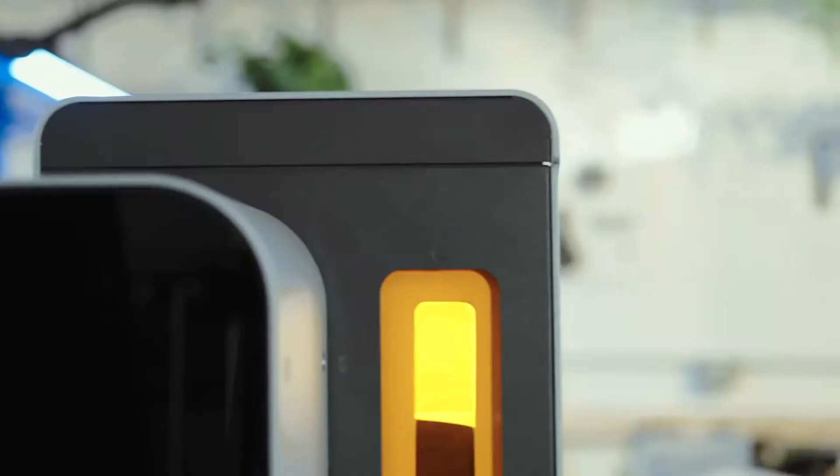Design and manufacturing workflows are closer together than ever, but our ideas still often exceed what we can physically realize. A new wave of independent manufacturing starts now with the Fuse 1, an affordable, compact SLS 3D printer with an intuitive workflow.

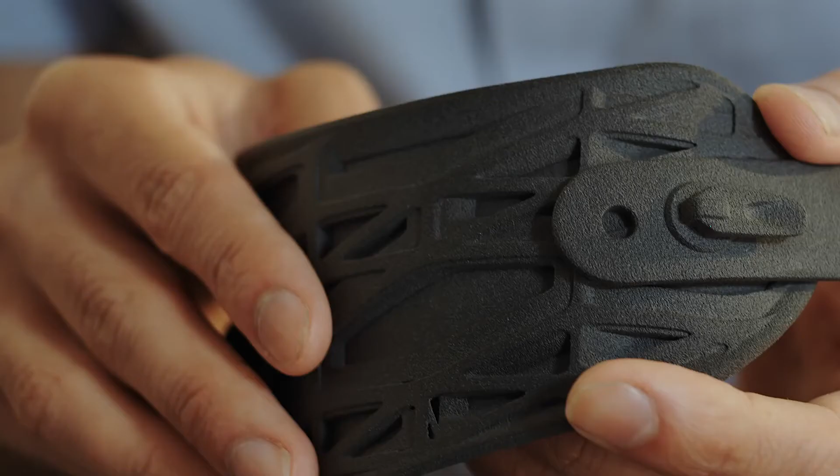Selective laser sintering, or SLS 3D printing, is relied on for printing strong, functional nylon parts. In the past, SLS has been too expensive and difficult to use for many businesses. The Fuse 1 allows you to fabricate production-ready parts and high-performance prototypes.

Control your entire process from iterating on your first concept design to manufacturing finished products. The process starts in Preform, our print preparation software. Preform's part packing algorithms can automatically arrange many models in a build. During setup and printing, the Touch UI walks you through every step.

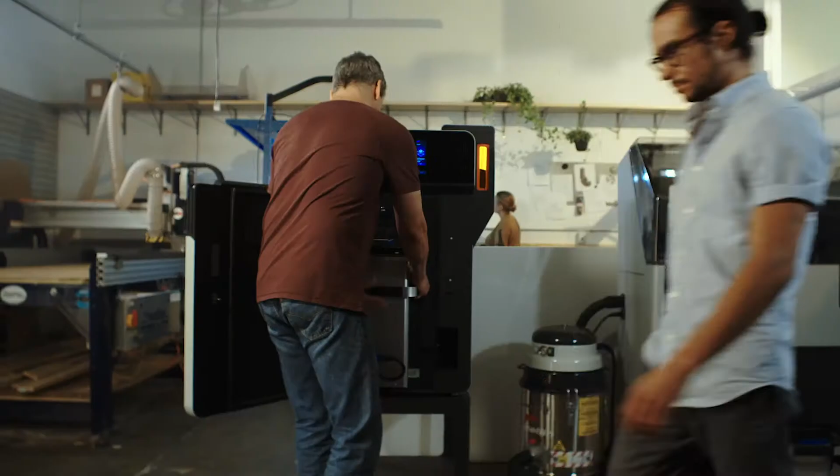Monitor your print from the touchscreen or from your computer via the integrated live camera. Once your print is complete, transfer the build chamber to the Fuse Sift. This safe, efficient powder recovery station completes the workflow.

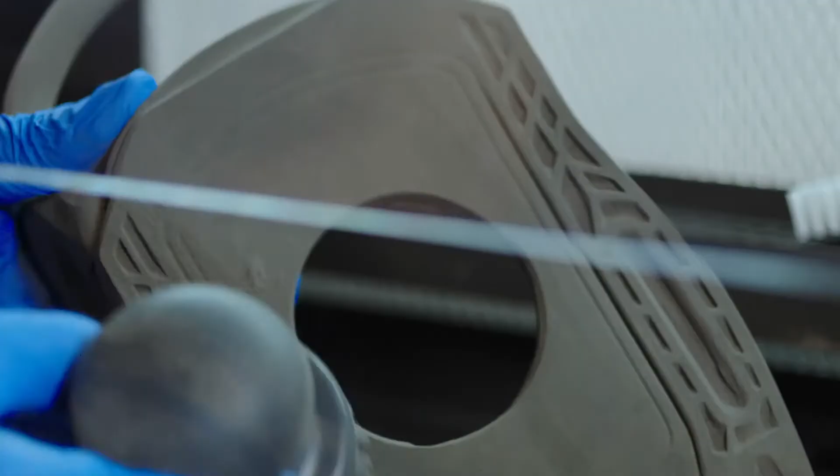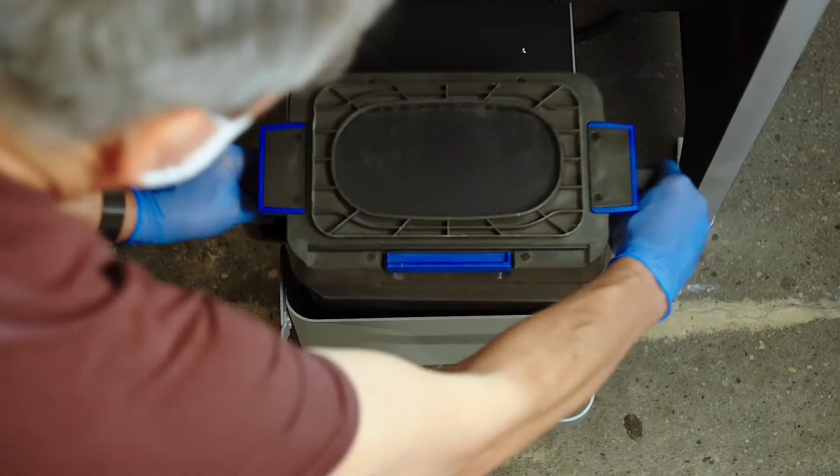Fuse Sift will automatically dispense and mix used and new powder after you set the ratio. Reduce waste by recycling powder at a 30% material refresh rate. This means you can print up to 70% recycled powder.

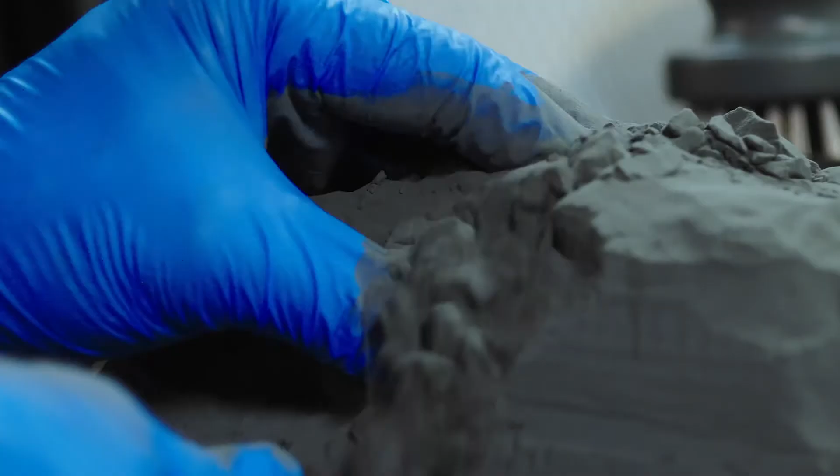After you've transferred a completed build to Fuse Sift, swap out the entire build chamber from the Fuse 1 for non-stop printing. SLS 3D printing fuses nylon powder layer by layer. The unused powder supports the parts during printing, so you can create complex, interconnecting designs with no need for support structures.

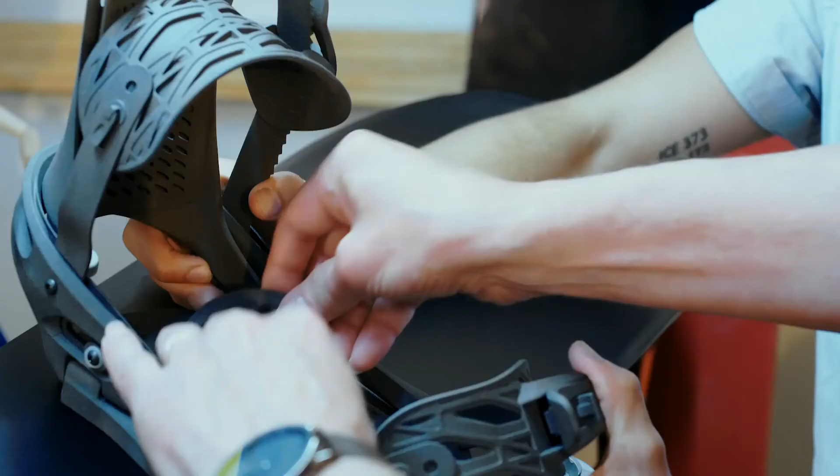Nylon parts balance strength, flexibility, and detail, so prints are ready for rigorous functional testing or to ship ready-to-use products to customers. It's time to rethink product development and take control of your own manufacturing. The Fuse 1, Production SLS, finally within reach.